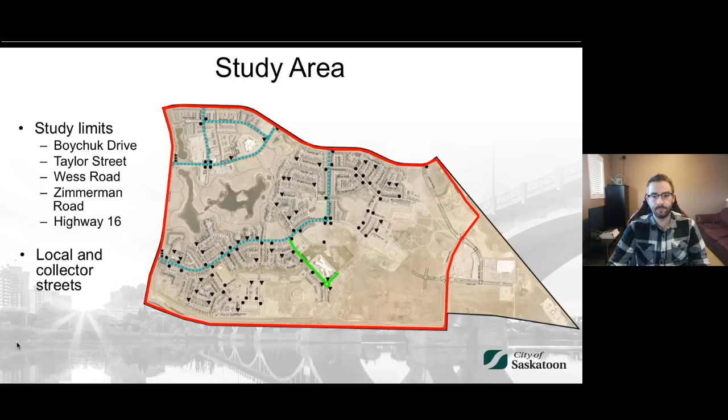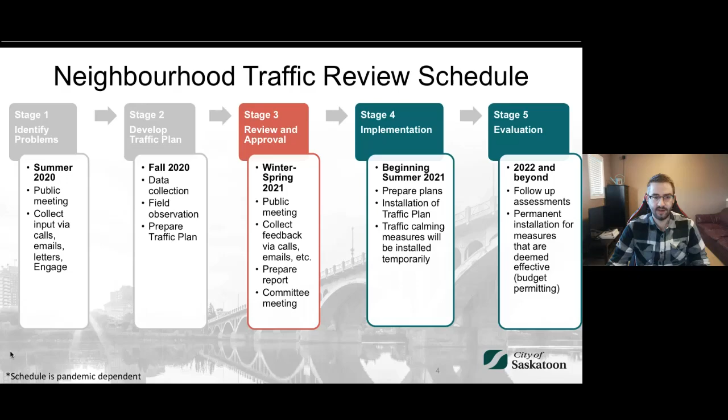This slide provides an overview of the neighborhood traffic review schedule. Last summer, we completed stage 1 and identified the traffic problems in your neighborhood. Based on the comments we received, we developed a data collection program and collected the data in the fall of 2020. This included traffic volume studies, speed studies, and field observations. We are now in stage 3, review and approval, where we will discuss the draft traffic plan with the neighborhood tonight. This is another opportunity for you to provide feedback, and I'll discuss the next steps in the schedule later this evening at the end of the presentation.

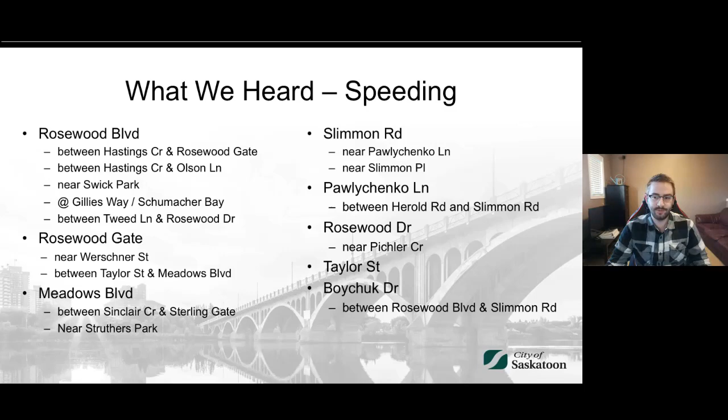This slide shows all the locations where we received feedback regarding speeding. There were concerns for many streets in the neighborhood, including Meadows Boulevard, Rosewood Gate, Slimmon Road, Pawlychenko Lane, and Rosewood Drive, Taylor Street, and Boychuk Drive. I won't go through each of the individual locations, but if we're missing any, please let us know in the comments.

We received feedback on a number of locations where there are concerns with traffic operations. This could be anything from concerns regarding the intersection traffic control, like a stop sign or a yield sign, poor visibility due to parked cars, or even people making U-turns on busy roads.

We also heard other types of concerns that don't fall under any of the previous categories, such as road and sidewalk maintenance, winter road maintenance, and vehicle noise. Locations with these types of concerns were scattered throughout the neighborhood, and we also received some for arterial streets surrounding the neighborhood.

After receiving all these concerns, we began collecting data to prepare for the draft traffic plan. I conducted field observations throughout the neighborhood at different times of day. Our staff completed 6 traffic volume and speed studies, as well as 9 intersection traffic and pedestrian volume studies. I also reviewed the previous 5 years of collision history in order to identify locations with high numbers of collisions.

Based on the feedback we received and the data we collected, we generated a list of measures to address your concerns. Here's a summary of what we are proposing tonight. We'll go through each recommendation in detail in the following slides, but in general, some of the types of improvements we are recommending are parking restrictions, playground signs, pedestrian crosswalks, sidewalk ramps, curb extensions, median islands, signage improvements, and permanent traffic calming installations.

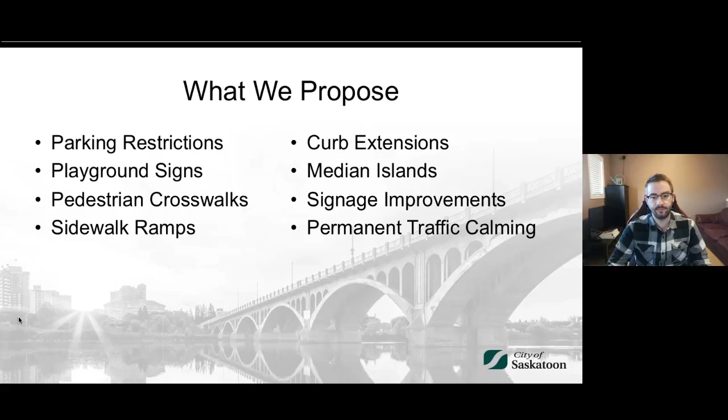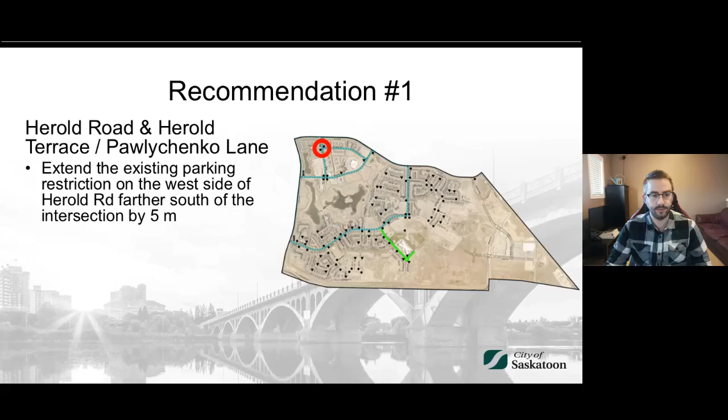Now let's get into it. So our first recommendation is located at the intersection of Herold Road and Herold Terrace and Pawlychenko Lane, which is in the northwest corner of the neighborhoods. You can see the intersection circled in red on the map on your screen. This is the first intersection you cross after turning onto Herold Road from Taylor Street on your way into the Lakewood Suburban Center. At this location, we're recommending that we extend the existing parking restriction on the west side of Herold Road south of the intersection by 5 meters.

Extending this parking restriction will ensure that parked vehicles are not blocking the visibility of pedestrians waiting to cross at the crosswalk. You can see the little red arrow on your screen kind of gives the rough extents of what that parking restriction would look like.

So anything come in, Natalie? Yeah, we do have a comment. It's not related directly to this recommendation, but the question is, do you have a way of extrapolating regular traffic flow based on measurements taken during COVID-19?

Throughout the COVID lockdown and pandemic, we've been keeping track of our permanent traffic monitoring stations throughout the city, comparing those volumes to our 2019 and older normal volumes. So we do have a good idea of how much lower the traffic volume has been throughout the city. In times when cases were lower, it was getting in the 10 to 15% range. When cases were really spiking, it was jumping up to the 35% reduction range. So we've been keeping a close eye on it.

In any case where the traffic volumes were close to triggering something, or if it had been a bit higher and it wasn't COVID, we were definitely taking that into account and erring on the side of caution. And I'll just add that we didn't complete our data collection for the neighborhood until the fall, once school returned, when the traffic volumes at our permanent counting stations were very close to what they had been before the pandemic.

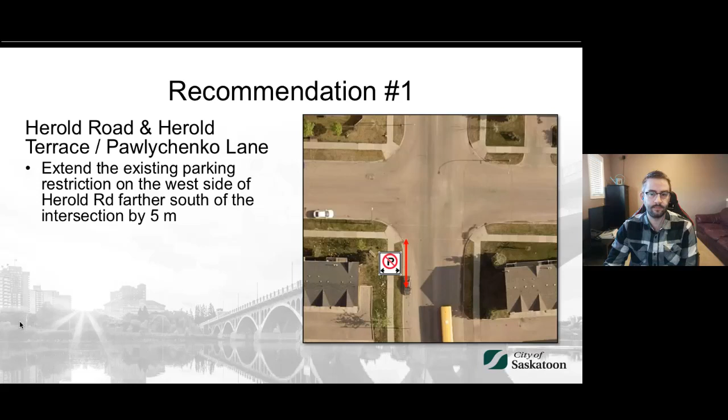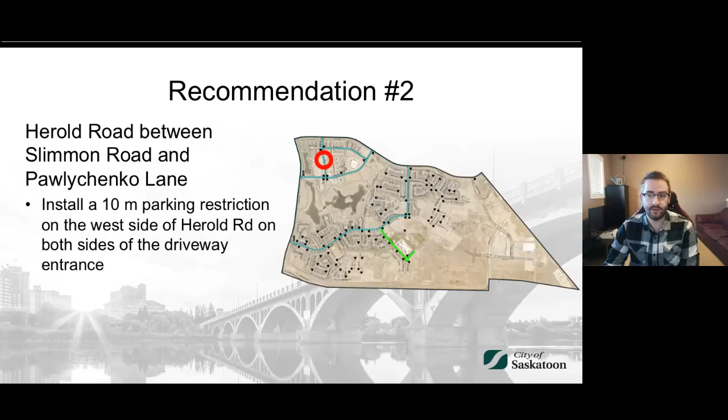We heard from residents that it can be difficult to turn onto Herold Road here if people are parked too close to the driveway. The recommended parking restrictions should make it easier to see oncoming traffic, even with the curves in the road on either side of that driveway.

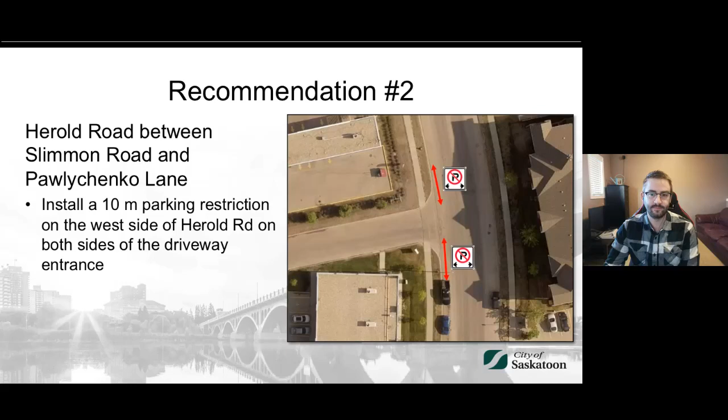Nothing's come in yet. It takes a few minutes maybe to type it in, or maybe the people who are attending tonight aren't directly affected by this one. We can always come back. Yeah, we can. Yeah.

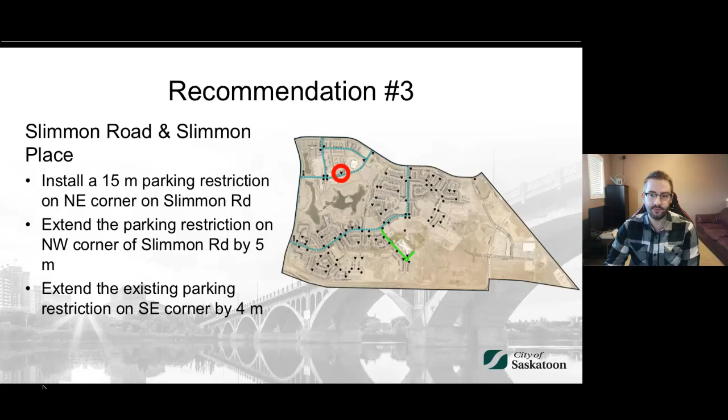All right. Our third recommendation is at the intersection of Slimmon Road and Slimmon Place in the Lakewood Suburban Center. This is the intersection directly across from Hyde Park and just east of the Dairy Queen and the RBC. So similar to the Herold Road and Herold Terrace intersection, we are recommending parking restrictions in advance of the crosswalks to ensure adequate visibility of pedestrians waiting to cross the roadway.

We will be installing a new parking restriction on the north side of Slimmon Road east of the intersection and extending the existing parking restrictions on the south side of Slimmon Road east of the intersection and the north side of Slimmon Road west of the intersection. That was a mouthful, but again, the picture on your screen, the red arrows represent the parking restrictions. There is an existing parking restriction in the southwest corner, but due to the driveway a bit further to the west, we didn't need to extend that one anymore.

I know we had a request for an all-way stop at this location. We heard about that, we looked into it, but it didn't meet our requirements to change it from the stop control at Slimmon Place to an all-way stop.

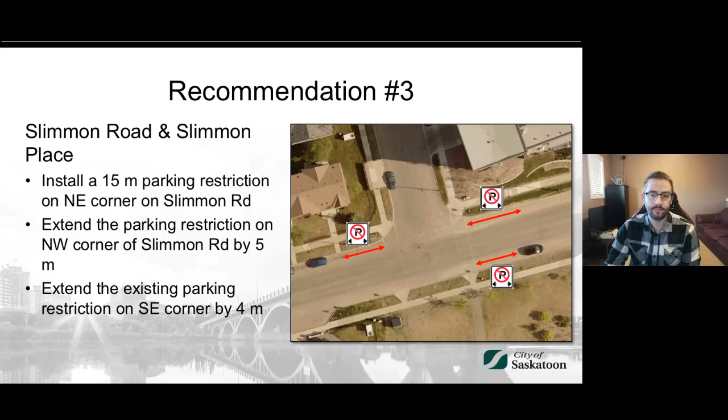Yeah, no comments have come in about this one or the previous ones. Okay, I guess we'll keep going.

So recommendation number 4 is at the intersection of Taylor Street and Slimmon Road. This is where you can cross Taylor Street to access the ball diamonds and sports fields at Donna Birkmaier Park. We heard that the traffic increase on Taylor Street can make it difficult to cross the road as a pedestrian, but since Taylor Street is an arterial roadway, it falls outside of the scope of this NTR.

That being said, we will plan on evaluating this intersection for pedestrian devices through a separate process.

We plan to do that this summer now that Taylor Street has been extended all the way to Meadows Parkway. The connection is open now, so we plan to investigate that this summer.

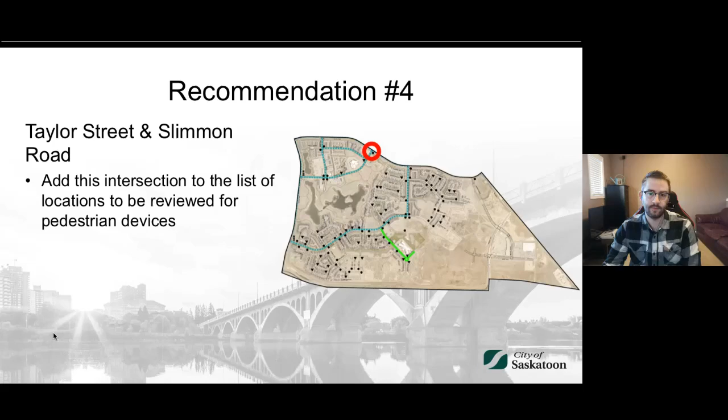So the 5th recommendation is for a series of changes to the intersection of Rosewood Gate and Meadows Boulevard/Hastings Crescent. This is the first intersection you cross after turning south onto Rosewood Gate from Taylor Street. This was the intersection we heard about most from the community during the engagement process last year. The main concern we heard was that it can be difficult to see northbound and southbound traffic traveling on Rosewood Gate when you're waiting to turn from one of the side streets.

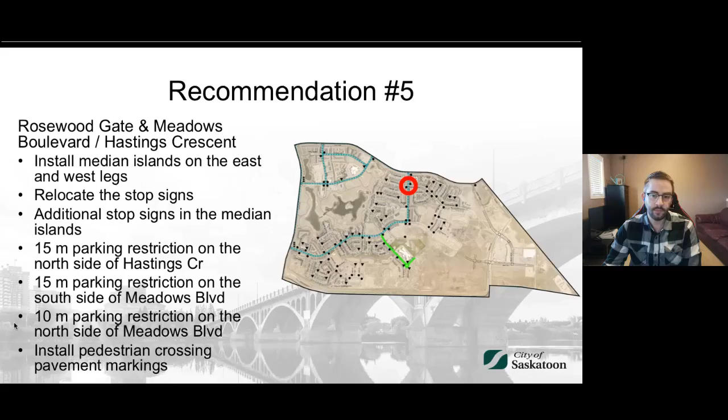So in order to address this issue, we're planning on installing median islands on the east and west legs of the intersection. This will allow us to install a second set of stop signs and move all the stop signs forward into the intersection. Moving the stop line forward should give drivers better sight lines of oncoming traffic while waiting to turn onto Rosewood Gate. Moving the stop signs will put them in front of the crosswalks, so to make sure pedestrians know where to cross, we'll be painting the crosswalk lines on all 4 approaches to the intersection. Finally, we'll need to install parking restrictions on the north side of Hastings Crescent and the north and south sides of Meadows Boulevard to ensure that larger vehicles like school buses and fire trucks are able to navigate around the median islands.

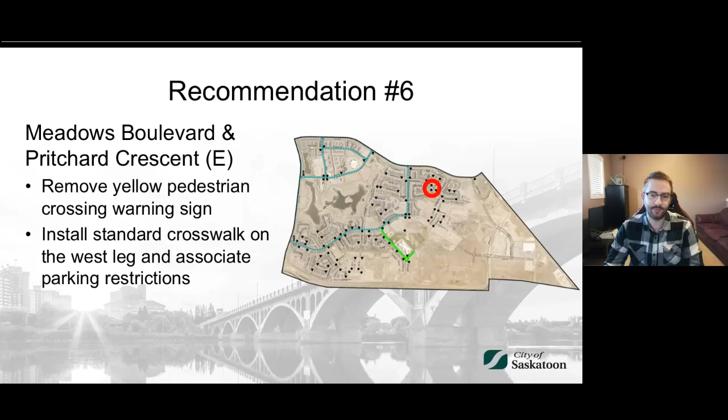If we move east on Meadows Boulevard, our next set of recommendations is at the intersection of Meadows Boulevard and Pritchard Crescent. Pritchard Crescent intersects with Meadows Boulevard twice, so the one we're looking at is further to the east, right beside Struthers Park. Right now there's a yellow pedestrian warning sign for eastbound traffic approaching this intersection. We are recommending that we remove this warning sign and replace it with a standard pedestrian crosswalk with signs on either side of the roadway. We're also recommending parking restrictions on both sides of Meadows Boulevard to ensure visibility of pedestrians waiting to cross.

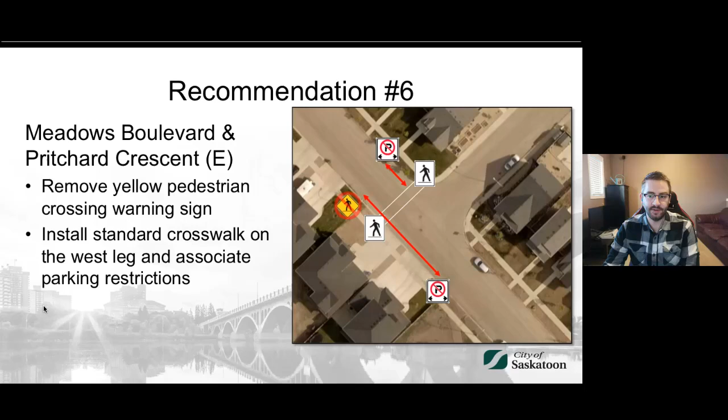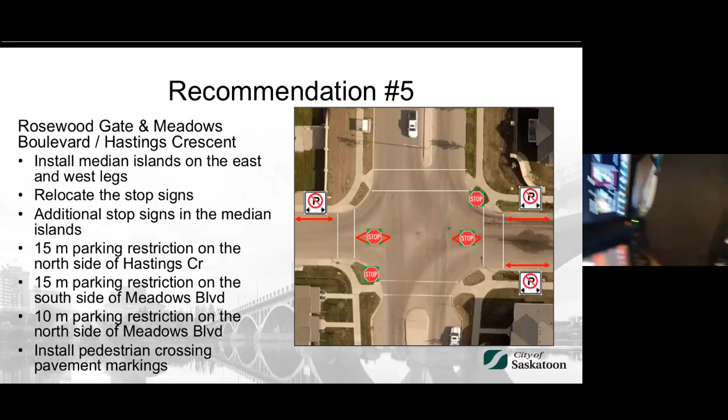The question is, would the stop occur in the crosswalks? It's a bit of a weird situation in this one. There's a similar situation on 17th Street, right, Natalie? Yes, 17th Street West, west of Spadina, between Spadina and Avenue P. So to answer the question, yes, the vehicle stopped at the stop line could potentially block the crosswalk. We're in a bit of a tough spot with this intersection. We've been trying to figure out the best way to improve it for everyone.

And this is our idea that we've come up with right now. We're here tonight to get your feedback on it.

So in our mind, the biggest problem we saw here was that it's very difficult to see oncoming traffic, so people are having to creep up into the intersection past that crosswalk. If we put in those extra stop signs, median islands, and paint the crosswalk, it'll make sure everyone approaches the intersection more cautiously, knowing there might be pedestrians crossing. That's one of the best solutions we can put in right now.

Okay, no other comments came in.

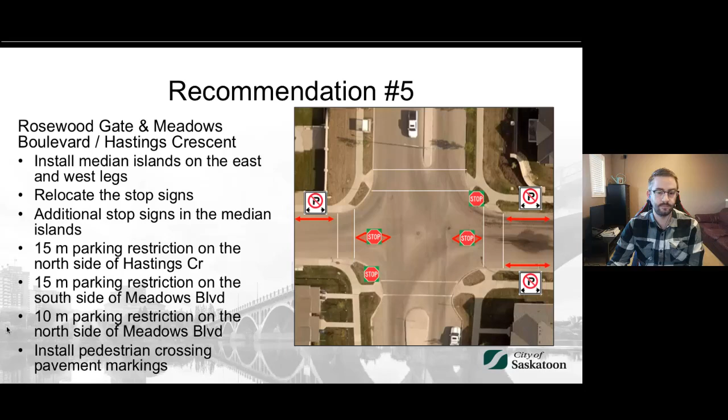So I think you can move on to the one after Struthers Park there. Sure, so that will be number 7.

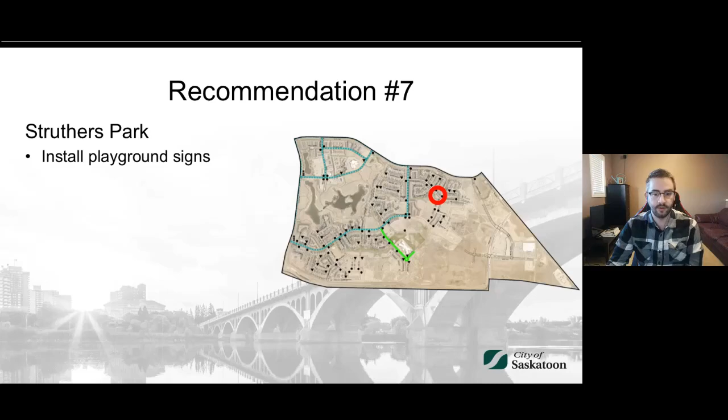Continuing along Meadows Boulevard to the east, we have our 7th recommendation as the roadway goes past Struthers Park. At this location, we are recommending the installation of 2 yellow playground warning signs. The first sign will be located on the south side of Meadows Boulevard, facing eastbound traffic as they approach Struthers Park. The second sign will be on the opposite side of the park, on the north side of Meadows Boulevard, facing westbound traffic. So in either direction as you're approaching the park, you'll see the yellow playground warning sign.

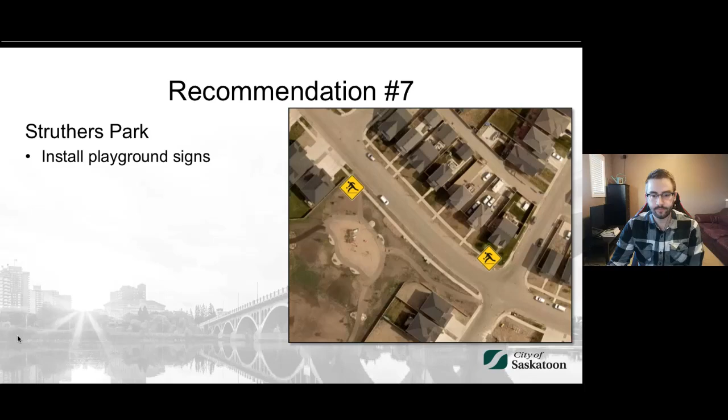Okay, nothing in the chat so far.

Now we're going to jump over to the west side of Rosewood Gate for recommendation number 8, which is located at the intersection of Werschner Crescent and Werschner Lane.

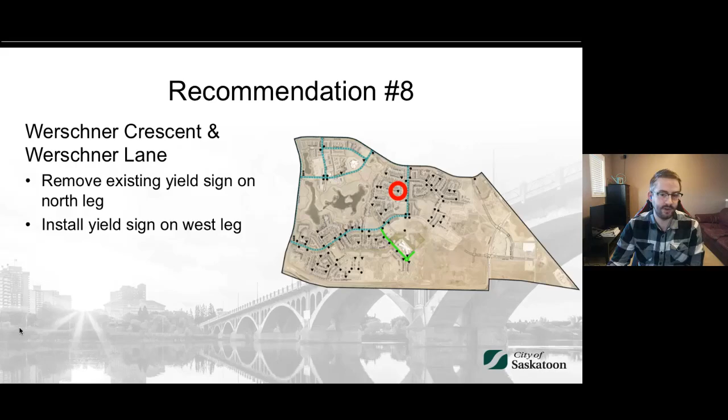Werschner Lane intersects Werschner Crescent at 2 different locations, so the one we're looking at is further to the east, closer to Rosewood Gate and Werschner Street. At this location, the yield sign is currently on the north leg of the intersection. With this configuration, it can be unclear who has the right-of-way between eastbound and northbound traffic. So we are recommending moving the yield sign to the west leg of the intersection. If you imagine someone making that eastbound left turn and someone making a northbound through movement, they both wouldn't have the yield sign, going to the same place, so it's a bit unclear who has the right-of-way. If we move that yield sign, it would be clear that the northbound person has the right-of-way.

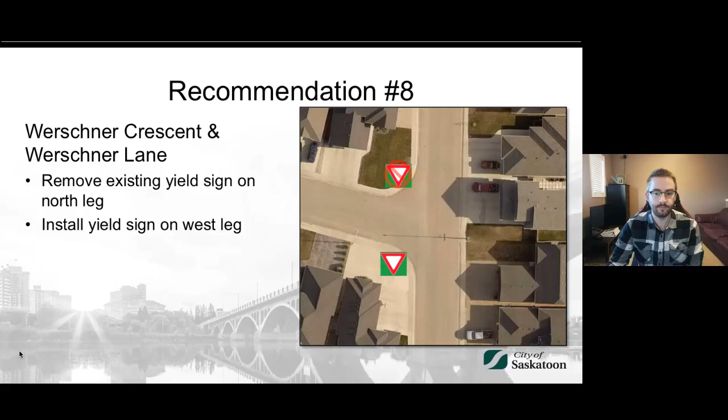Anything new come in? Nothing new yet. Seems like they're either not affected by these or they agree with them so far. Or thinking about it still, typing away maybe.

All right, so now we're going to do another little jump back over to Rosewood Gate at its intersection with Werschner Street for recommendation number 9. Werschner Street forms a gap between the linear parks to the east and west, and we heard that there's a lot of pedestrian demand going along Werschner Street between the 2 parks.

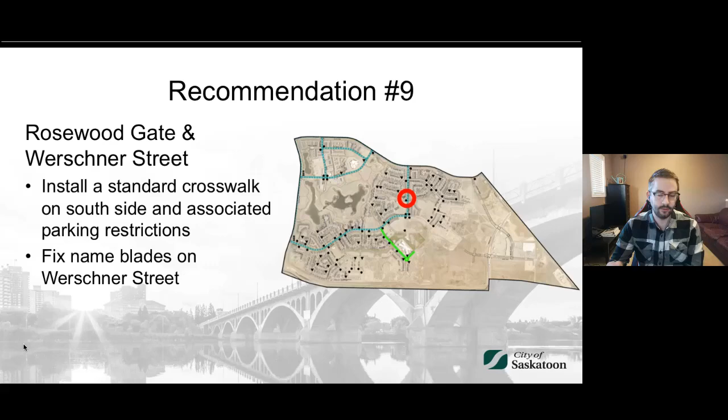So in order to increase safety for pedestrians crossing Rosewood Gate, we are recommending the installation of a standard crosswalk on the south side of Werschner Street. As with the other crosswalks, we will also be implementing some short no parking zones to ensure visibility of pedestrians waiting to cross. We're also going to be correcting the street name signs to show Werschner Street instead of Werschner Crescent. I can see how that would be confusing if you live on that street.

But here we took a look at the pedestrian volumes, and the south side of the intersection had quite a bit more pedestrian crossings than the north side, so that's why we chose to put the crossing on the southern crosswalk.

Don't see anything in the chat right now.

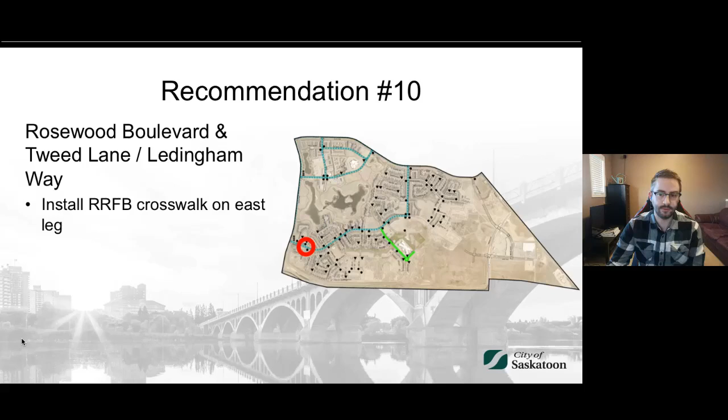So for recommendation number 10, it's located at the intersection of Rosewood Boulevard and Tweed Lane / Ledingham Way. This is the intersection at the edge of the commercial area near the Boychuk entrance to Rosewood. Tweed Lane is the roadway that runs beside that 7-Eleven.

At this location, we are recommending a rectangular rapid flashing beacon crosswalk on the east leg of the intersection. This type of crosswalk includes push buttons that activate flashing lights on the crosswalk signs, as well as a painted zebra crosswalk on the roadway.

So there was a question about the Werschner Street crosswalk. They asked, can you also connect the linear park with a pedestrian ramp to the crosswalk? Right now there's no drop-down curb. Okay, that's good to know. I'll have to go take a look at that.

Just to clarify, maybe you can respond later, but are you talking about the linear park on the east side of Rosewood Gate? I suspect it's the east side because it looks like the sidewalk is separated from the curb there, so we might have to connect it with concrete and do the ped ramp down to connect the crosswalk. Yeah, that's what it looks like to me from the image, but we can field check that and add it to the recommendation, Amber. Thanks for pointing that out.

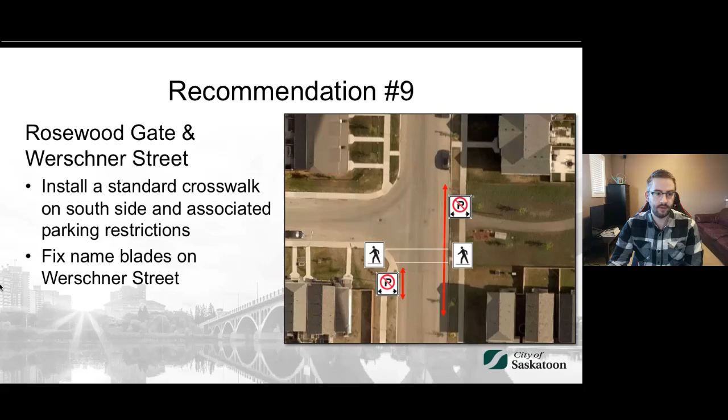So where are we now? Number 11? I don't know. I didn't see any questions come in for Rosewood and Tweed Lane, yeah, with the RRFB. I didn't see anything come in for that one. Okay, we can always jump back to that one later.

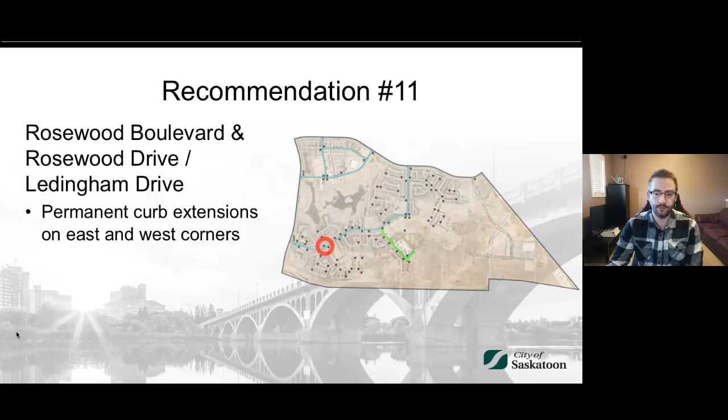But continuing down Rosewood Boulevard to the east, our next recommendation is at its intersection with Rosewood Drive and Ledingham Drive. This is the intersection right at the entrance to Swick Park, just past that first big curve on Rosewood Boulevard. At this location we currently have temporary curb extensions installed in the east and west corners of the intersection. Our before and after speed studies have shown that the 85th percentile speeds near the intersection have gone down since the installation of the curb extensions, so we are recommending that they be replaced with permanent concrete installations.

When I say 85th percentile speeds, I mean the speed that 85% of drivers travel at or below. This is an industry standard measurement we use to gauge the speeds most drivers feel comfortable traveling at, and it gives us a good indication of whether there's a speeding issue at any given location. At this location, the 85th percentile speed before installing the curb extensions was about 55.7 kilometers per hour, and after installation it went down to about 52.8. Our goal for this type of traffic calming is to reduce those 85th percentile speeds to within 5 kilometers of the posted speed limit. At this location we've accomplished that goal, so we want to turn that temporary installation into a permanent concrete one.

I'm not seeing any new comments yet.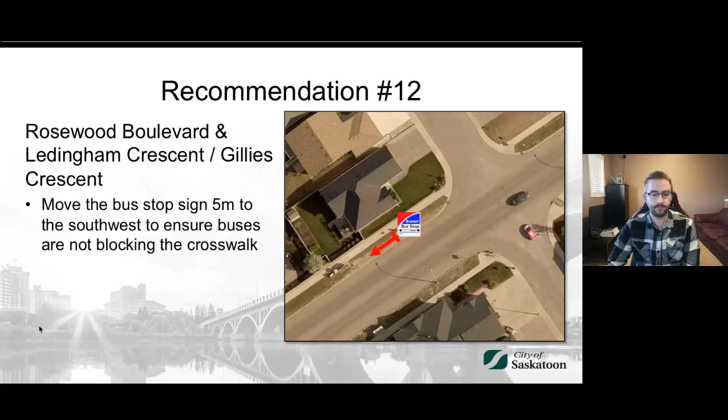And another comment came in for recommendation number 14. Median islands aren't as effective in the winter due to snow cover. We request an elevated visual cue.

Okay, you know, as we've seen at Rosewood Boulevard and Rosewood Drive, we did have those curb extensions. It's similar to the temporary things still made from those black rubber curbs. And we did see that those were effective at reducing traffic volumes or traffic speeds just a few blocks to the west. So I'm hoping that we would be able to see similar results here. And again, this is just something that we're going to try, we're going to see if it works. If it doesn't work in that evaluation period, we'll take a look to see if volume or traffic speeds have actually gone down, and if they haven't, then we can certainly consider other options.

Yeah, we do compile all of the comments, so we'll make a note of this. When we go through our small group discussions, we usually ask: do you agree with the recommendation or not? It's pretty clear from the amount of comments we're getting from this group that you don't agree with this recommendation. You would like to see a pedestrian-actuated device that's overhead, is what I'm hearing.

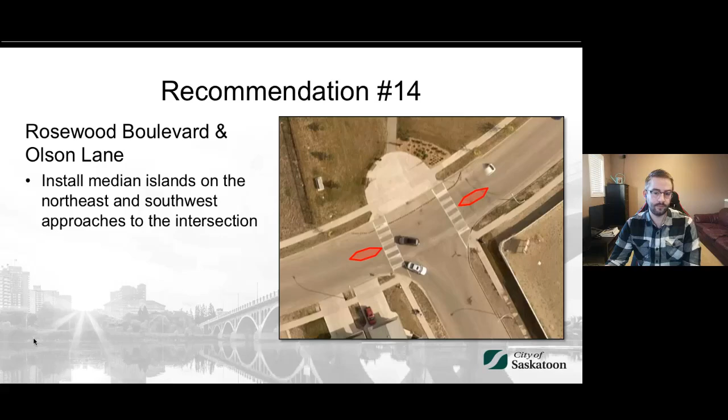But yeah, we do know with the temporary ones, they can get kind of plowed over and moved in the winter. We don't want to put in the permanent concrete installation right away and then find out that it doesn't work. So it's kind of our approach - we want to try it, we want to see if it works. There are some downsides to it, but if we see those speed reductions, then we can put in the permanent concrete versions that won't get destroyed in the winter, won't end up hurting fences, if I understand that correctly.

Yeah, I'm not sure about the plowing fences comment exactly. I don't know if curb extensions will correct that, but hopefully the reduced speeds help that situation.

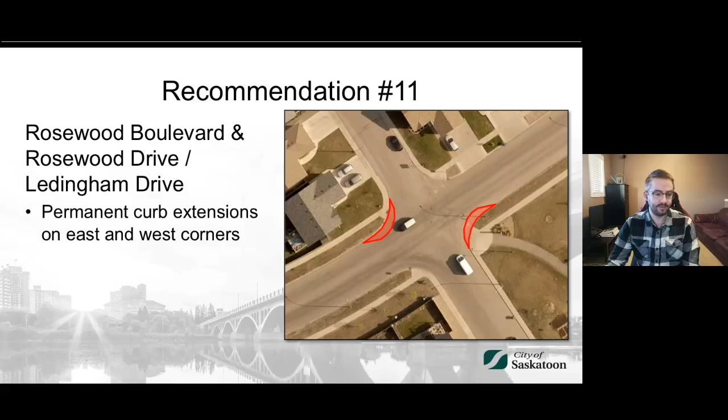Anything else or any other comments? Nothing new quite yet, and I just want to make sure we get through everything. We're getting through it quicker than I thought. Some of the recommendations were pretty quick to get through. So.

All right, now where did we actually leave off? We were on recommendation 14, so this is the next one.

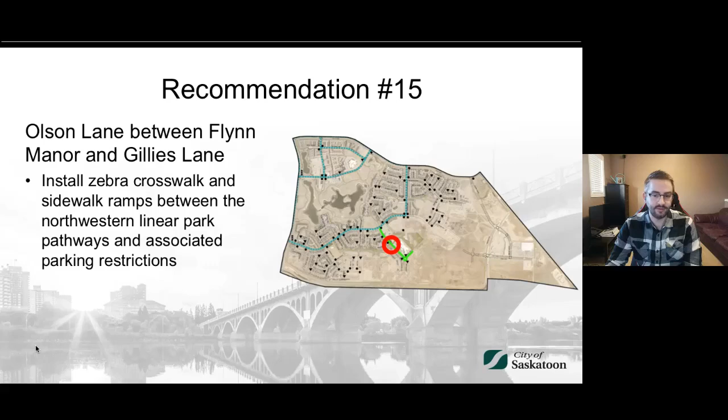Yep, okay, 15. So our next recommendation is just west of Colette Bourgonje School on Olson Lane. There's the pathway connecting McKay Park and Glen H. Penner Park on either side of Olson Lane. We received a request for a mid-block pedestrian crossing to provide a safe crossing location between these 2 pathways. So we're recommending a zebra crosswalk, signage, sidewalk ramps, and parking restrictions between the 2 pathways. The zebra crosswalk is the one with the big, wide, painted white lines on the road to make it even more obvious that there's a pedestrian crossing there.

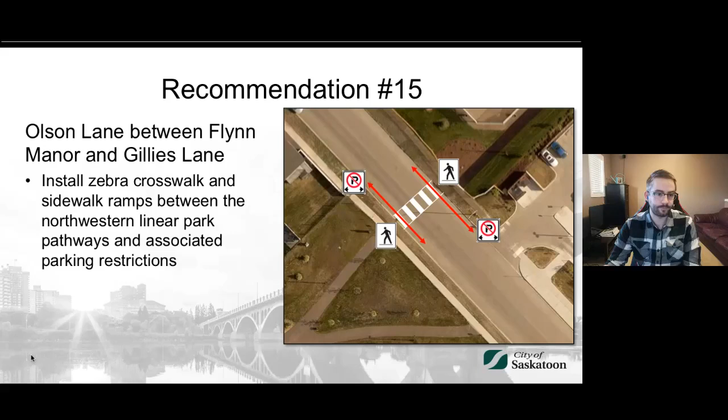Anything new? Nothing in the chat quite yet. Okay.

So moving just a bit further down Olson Lane, our next recommendation is at the intersection with Flynn Manor. This is the intersection directly across from the main entrance to Colette Bourgonje School. Here we're recommending the installation of a no parking sign on the east side of Flynn Manor, just to reinforce the bylaw that states parking is restricted within 10 meters of an intersection. We heard from a few people that during peak times, people were parking too close to the intersection. And then I got a hold of our colleagues at Parking Services, and they verified that they've received a good number of complaints about this location. So we do want to just put in some extra signage to make sure people know they shouldn't be parking so close to the intersection.

Nothing new in the chat yet. Okay, so going west on Gillies Lane, just off of Olson Lane, we eventually get to Gillies Bay, which is recommendation number 17.

So here we are recommending the construction of an island in the middle of the bay. We heard from residents that they were being ticketed for parking in the middle of the bay, and constructing an island should give them a legal location to park. We did some rough drawings, rough estimates - we should be able to fit about 8 parking slots around the island and still allow for 2-way traffic in the bay. So there should be a good amount of parking and no more tickets for the people currently parking there.

All right, last but not least, our final recommendation is for Pichler Cove in the southwest corner of Rosewood, the cul-de-sac located just off of Pichler Crescent. Residents on Pichler Cove noted that drivers were frequently mistaking the cul-de-sac for a through road, so we're recommending the installation of a cul-de-sac sign to provide more clarity to drivers, so they're not turning in and mistaking that bend in the road for a through roadway. I believe there's a nice street light right near the intersection that we can stick that sign on.

We have a comment coming in, and I'm not sure if it's for Pichler Cove or for Gillies Bay, but they say yes, thanks, ETA. I guess you hit the mark with that one. I'm guessing it's Gillies Bay because they were pretty adamant about that at the first meeting, but I'm not sure. I don't think we've done many Bay Islands through these NTR processes, so I'm not totally sure on the ETA on that one, but it sounds like there's an appetite for it, so we'll try to get that going for you guys.

The next thing is, are there any other concerns that we haven't discussed yet, or were there any comments on other recommendations that we need to go back to? I know we might have some new people, so if there's a particular recommendation number you saw in those flyers we sent out that you might have missed, let us know and we can jump back to that. We'll give it a minute or so here if anyone has any questions or comments.

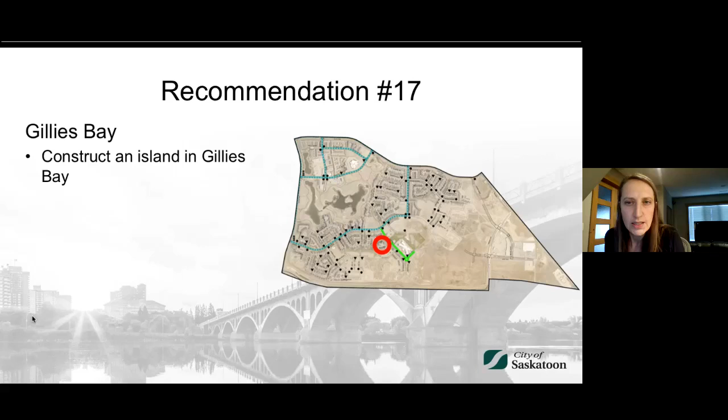And then there's a couple more questions that came in. Okay, number 16, recommend picture for number 16. Okay, that's the parking restriction at Flynn Manor.

So they say your picture for number 16 made me think about parking in front of the school. Can that stretch across from the school be marked to prevent all-day parking so that it can be used for school drop-off or pickup?

I'll have to double check, but I believe there's a bus drop-off zone or some kind of pickup and drop-off zone on the north side of the street there. Are they maybe talking about further to the west? I think they're talking about the side of the street across from the school, not the school side. Yeah, I think that's what they're referring to.

We work with the school divisions directly on signage needed for schools, and it usually only applies to the school frontage and flankage, not across the street.

Somebody says daycare staff park there all day. Yeah, we can't necessarily prevent daycare staff from parking there because it's public parking. Street parking is allowable for anyone to park there, but we can advise the school and they can maybe suggest that the daycare staff park elsewhere.

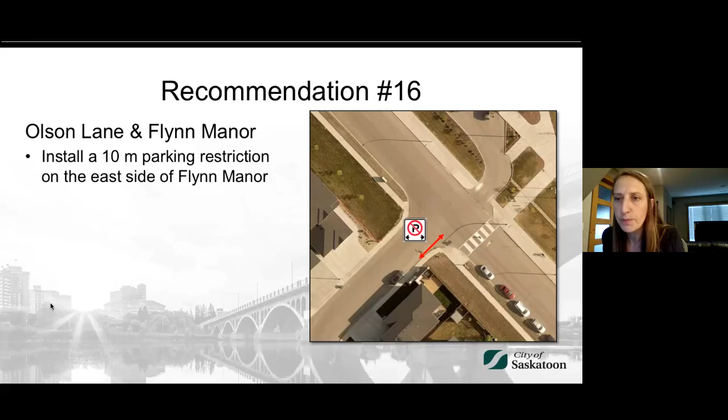Okay, I'm not sure which one to go to next. I think you've done a pretty good job hearing others' comments. I think a general rethink on number 14 needs to be done. There are minimum acceptable enforceable standards, and then there's what is prudent.

If we can put in an island for an isolated bay, we can add proper signage for children crossing. Thanks for bringing that up, Marineal. Yeah, that's the Rosewood Boulevard and Olson Lane comment. And someone had another concern.

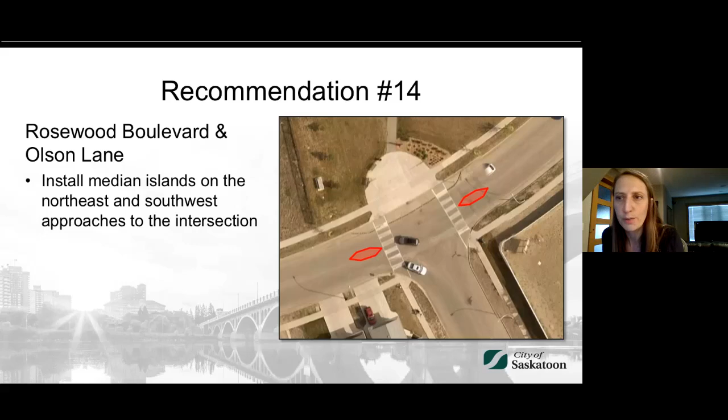Is there anything to help people leaving Tweed Lane in high traffic times? I don't remember that recommendation number, Marineal. It's back a couple. Let's see here. That one is number 10.

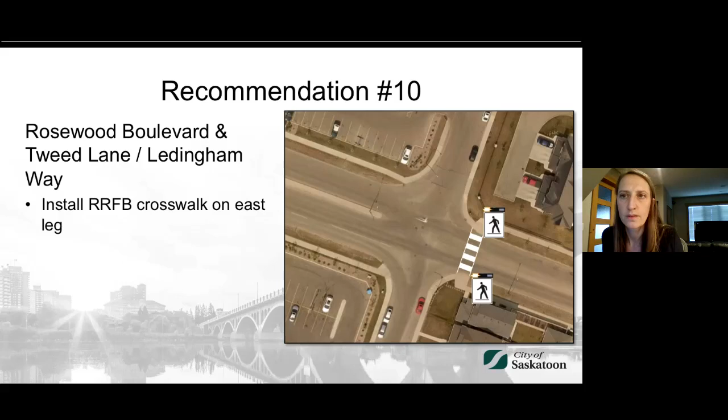So this location, we did hear about those difficulties turning during the peak times. We checked to see if the all-way stop would be warranted here, and if we could put in traffic signals. But again, we kind of have a consistent standard that we apply across the city.

For an all-way stop, we really need to see a higher percentage or comparison of traffic on the side streets. So there's not enough traffic on Ledingham Way and Tweed Lane compared to Rosewood Boulevard for an all-way stop. And similar to our pedestrian crossings, we also use the Transportation Association of Canada guidelines for traffic signals, and in this case it didn't meet those requirements either.

I went out there a few mornings to watch traffic and look at all the traffic in that area, people getting on Rosewood Drive and getting through Boychuk Drive. I did see how it can back up. It can be difficult, but it seemed like most people who were waiting could get through in one cycle of the signals, or the worst I saw was two, but I'm sure there are some days of the year that are worse than that.

But right now we don't have any recommendations for any changes there with regards to traffic operations. But glad you brought it up.

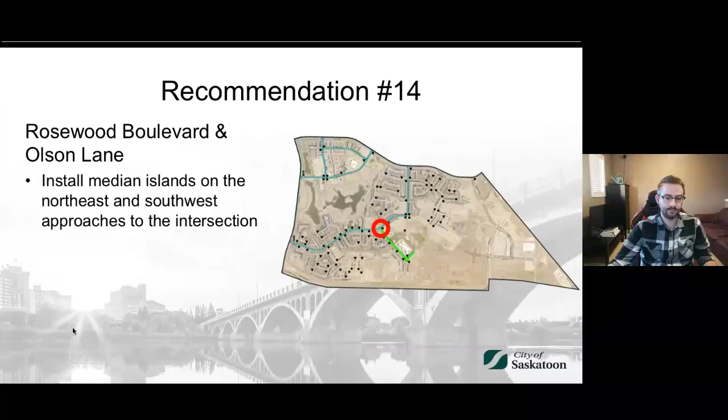Yeah, so there's a couple more. One related to the Gillies Bay recommendation. I think that was 17, Mary. For Gillies Bay, I hope that it's not all concrete island, and potentially a tree in there or grass.

It's already all concrete around us. Yeah, and like I said, I don't think we've had this situation come up before, so we won't know for sure if it's going to be a concrete island, but it would probably be cheaper not to do it as a fully concrete island. So it's definitely something we'll look into and consider.

Yeah, it is nice to have trees and grasses in the median islands. They're not always maintained the way we like. We've heard from neighborhoods that do have grass and trees in the islands that sometimes it becomes a maintenance concern.

Like Jillian said, we haven't done many of these before, or any, through the neighborhood traffic review. So it might be softscaping, like you suggest, some type of landscaping, or it might be hardscaping, maybe more like a paving stone or something. We're not sure yet, but certainly the more feedback we get, the more we can forward on and take into consideration when we make those decisions.

So another comment: there's constant speeding on Rosewood Gate North, including a lot of construction vehicles traveling. I know we did a speed study on Rosewood Gate, I think it was between Meadows Boulevard and Wershner Street. Let me just see if I can bring it up.

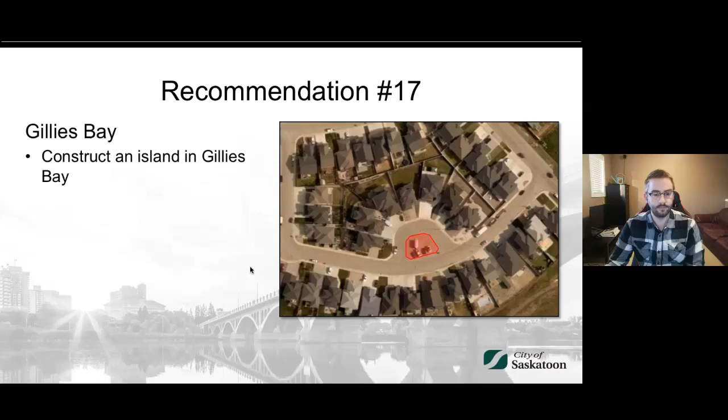Based on the Swick Park location you mentioned, we've already seen some success with the horizontal type of devices on Rosewood Boulevard. So we're hoping for the same type of success with the new additions we'll be making.

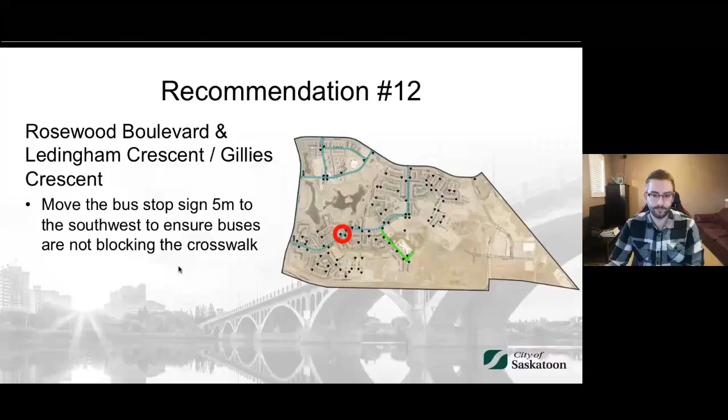So one question came in for number 10: perhaps some better lighting overall - at night it's extremely hard to see pedestrians waiting to cross while still on the sidewalks. That's some good feedback, I don't think we'd heard that from anyone, so that's good to know.

I know for one of the other locations, we had asked our colleagues at Saskatoon Light and Power to take a look at the street lighting to see if it met their standards. That's potentially something we could do again here, and if there isn't enough lighting, we've certainly worked with them in the past to improve it.

Somebody wanted to clarify for Rosewood Gate North which streets we did the speed study between. It would be Meadows Boulevard / Hastings Crescent, that first intersection south of Taylor Street, and then between there and Wershner Street, the next intersection to the south - so that middle chunk of Rosewood Gate. If there's speeding concerns either to the north or south of there, let us know.

Okay, and one other question. Who should we contact about the general state of disrepair on the softscaping of all bus stops? Lack of grass cover, unleveled, unfinished medians, and so-called grass sides near sidewalks. Significant drop-off for so-called finished positions often leads people to temp park in weird and wonderful places along Rosewood Boulevard to avoid them.

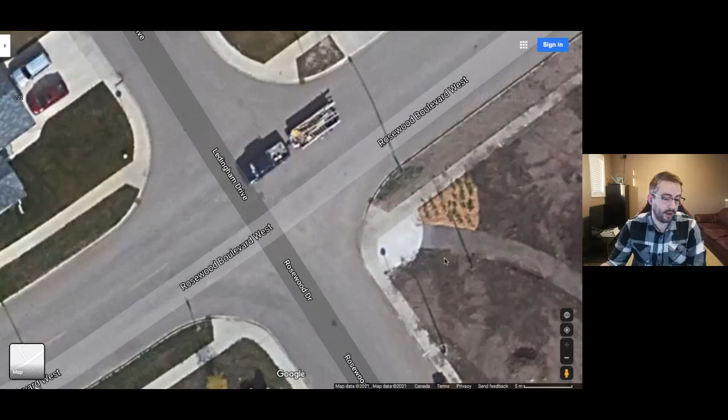So I guess the answer is kind of similar to the last one. We are still waiting for those traffic patterns to normalize with the connections of those roads to the rest of Rosewood. I know we had a few requests for crosswalks on Rosewood Drive, but right now they don't meet some of our requirements for pedestrian crossings. But as those connections are made and more people are using those roadways, we can come back and reevaluate and see if there's anything we need to put in.

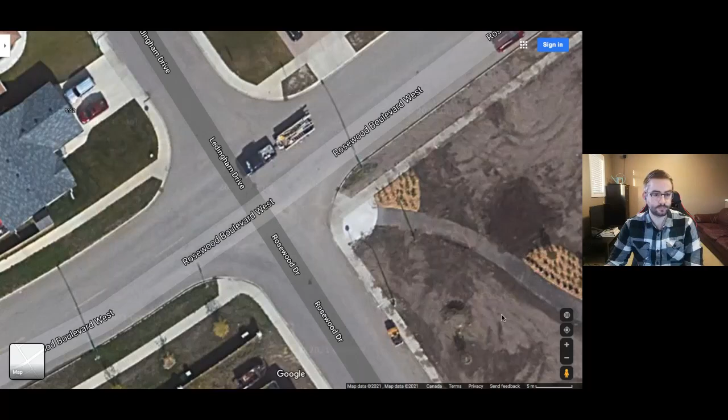Yeah, and we'll try to take a look at the specific locations you're talking about when we've got a better map. We'll try to look at that as we develop the final traffic plan. If you can clarify the exact crossing locations you're looking at, then we can make sure we've assessed them.

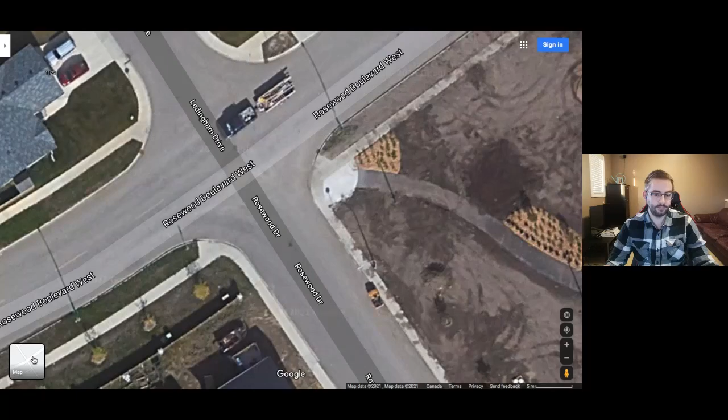Another comment came in about the Taylor Street connection to West Road. They know it's outside of the NTR scope, but they're wondering if there's consideration for the temporary traffic signs, since who needs to yield is marked poorly and no one seems to understand who should go or who shouldn't go. Everyone goes and no one yields, and the street is very narrow at the curve.

I think that is right at West Road. West Road is going to be closed south of Taylor Street permanently, so we've treated it kind of like a curve at that intersection. Eventually West Road will actually close at 8th Street as well, once the rail crossing is built there, so this intersection will change quite a bit. But we could probably go out and take a look at the temporary signage and see if there's anything we need to clarify.

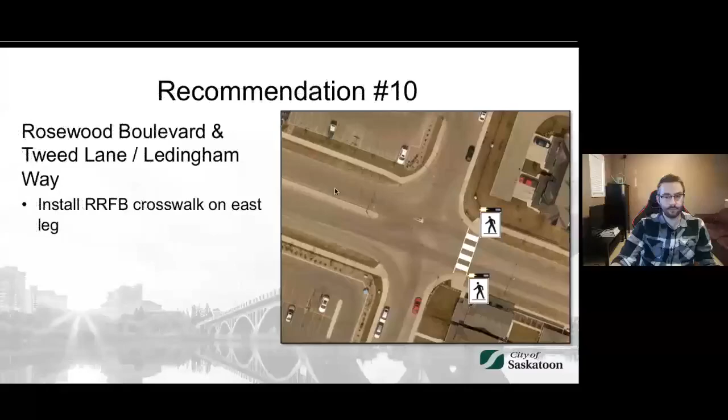All right. Okay, so I'm not seeing anything new quite yet. I'm hoping, let me just kind of go back and make sure I got them all. I think that's all the main ones there. Yeah, I think you can move on to next steps, Julian, and if more come in, I'll let you know. Okay. Shaking my camera.

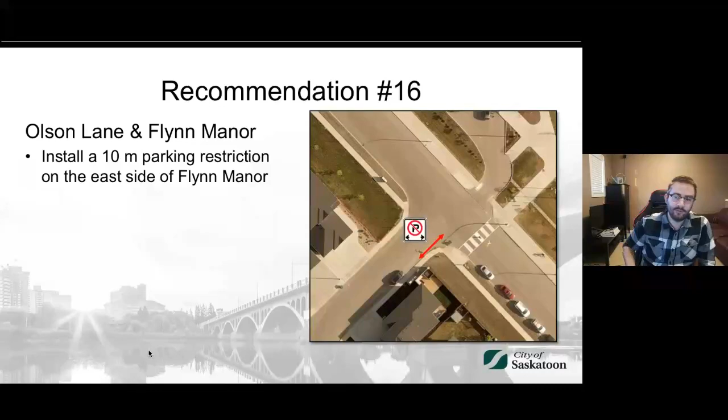A comment period will be open for a month beginning after this meeting and ending on May 29th. Once that comment period has come to an end, we'll finalize the traffic plan and prepare a report to present to the Standing Policy Committee on Transportation.

The 4th stage is the implementation of the traffic plan, which includes the preparation of plans and installation of the recommendations. Signage, pavement markings, and temporary traffic calming measures are typically installed within a year after presenting the report. Traffic calming measures will be installed temporarily for a minimum of 1 year.

The evaluation stage includes follow-up assessments to determine the effectiveness of the temporary traffic calming measures. Measures deemed effective will be scheduled for permanent installation as funding allows. Measures deemed non-effective will either be modified or removed. This stage is dependent on stage 4 and will be scheduled to begin 1 year after the temporary traffic calming measures are installed so that we can ascertain the effectiveness of the measures in all seasons.